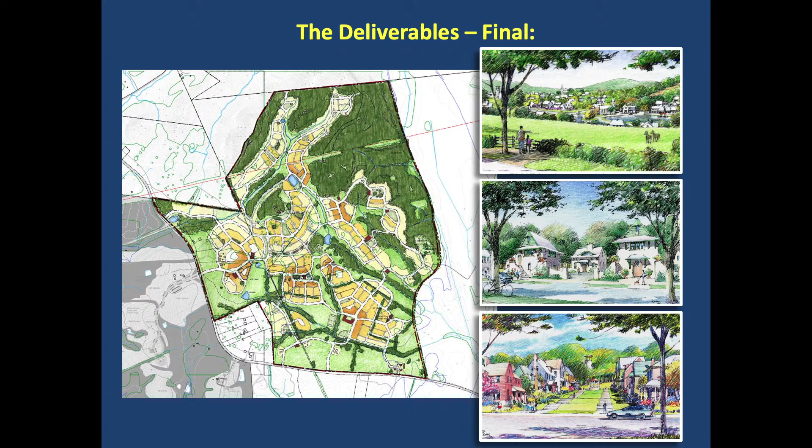The colors are much more legible on the plan we're doing tonight, so hopefully that issue will no longer be a problem. Compatibility with the 2007 comprehensive plan from a policy point of view, this idea that a neighborhood has a general format of a neighborhood center, neighborhood general, and neighborhood edge condition.

Again, the color is awful there, but the neighborhood center is, as the name suggests, typically located in the physical center of the neighborhood, and it's the most compact, where the smallest lot residents typically reside, but it's also closest to neighborhood amenities and services.

The general is both the largest area, but also has the broadest and most diverse range of house types. And then the edge, typically, particularly in a context like this, is usually where we always put the largest lot, single-family detached houses.

And of course, this photograph is from right down the street. And when we say largest lots, you have to qualify that, because the average size of the lots over here in Forestdale is about one-third of an acre.

I just realized, maybe it is in here. I think I've got it. There was some discussion about sustainability. We talked about the Carolina Coastal Conservancy.

They did a very detailed study analyzing the different water impacts of natural conditions, sprawl conditions, and town conditions. And a lot of that is based not only on the reduction of the developable area compared to conventional suburban development, but also on best practices in stormwater management for water quality.

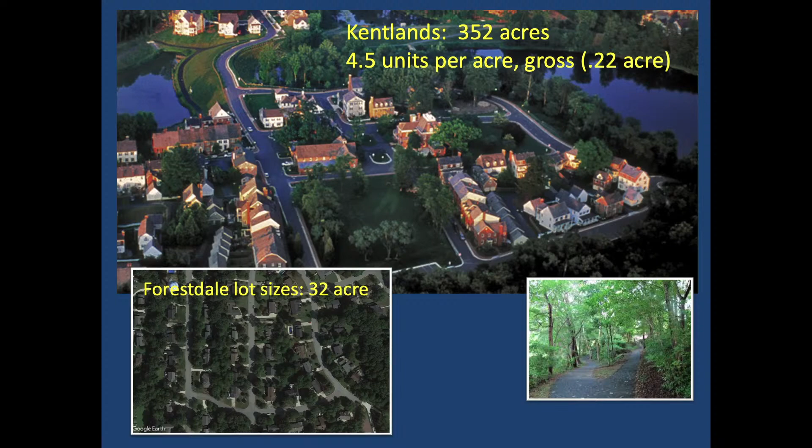We compared that to Forestdale right down the street. The average lot sizes, which we measured on Google Earth, were 0.32 acres apiece. So the net and the gross, comparing Kentlands to Forestdale as a neighborhood, were actually relatively close. That means there are probably a lot of lots within Kentlands very similar to Forestdale. We used that as our baseline in designing this community, so that this property would be sure to have a significant number of lots that meet that standard.

That gave us the beauty of this, and one of the reasons why we take this approach — it gives us the ability to talk to both plans and analyze each one relative to how closely it met the community's expectations, how well it responded to the underlying principles we discussed. We got a lot of very useful feedback from both of these. But the most important thing is that they were both well liked by the respondents, and they were evenly split in terms of preference.

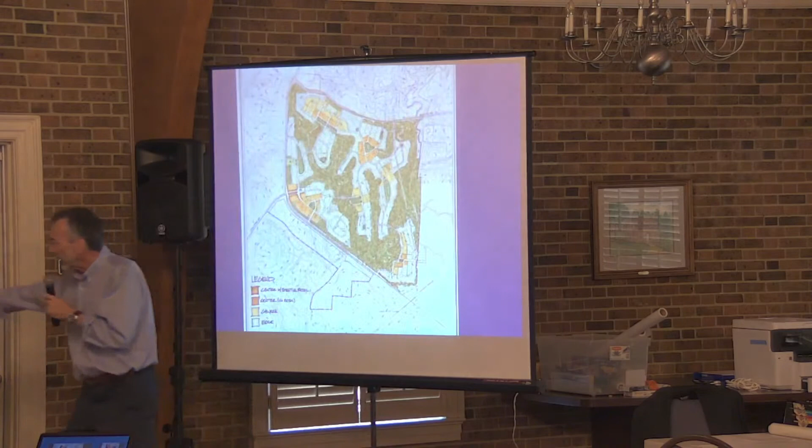The designers will try different ways of reconciling some of these things. You see right here, for instance, this green and this green, you're still seeing a lot of the same ideas, but in a slightly different configuration, both in terms of trying to merge the two plans and resolve them more closely with the topography.

I'll show over here that park right in the middle of this neighborhood, as well as this park right here — they're there because there was a large stand of trees in this area, and this was a high point on the site. So when we see something like that, we want to capture it and make it an amenity, both because of those unique characteristics and because by putting a square there, we're able to save as many of those trees as possible, keeping them as a shared amenity for the neighborhood and community, and because of that high point.

That was still there, but then when we looked more closely at the topo in that area, we realized there was a significant draw that came up and actually touched on that. So we let that come all the way up to that green so that now you have what we called, within the team, a peekaboo — an opening where all of a sudden the neighborhood opened up to the adjoining natural habitat. We really liked that idea because that was basically the site talking to us.

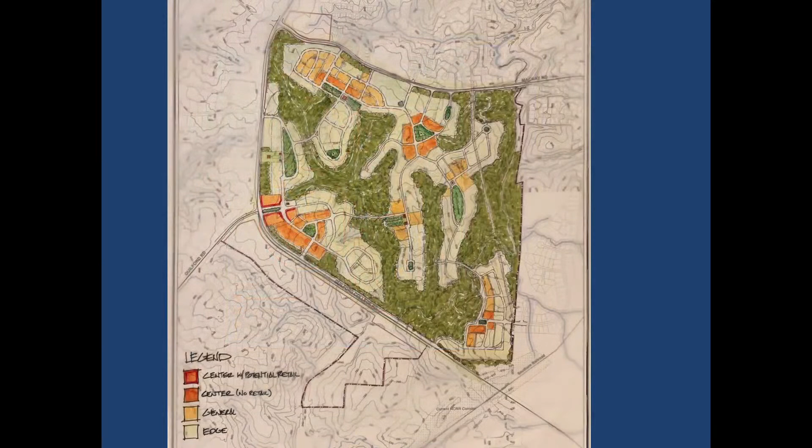So there's the neighborhood structure we talked about on opening night, the four neighborhoods, which have really become, I think, because this is mostly driven by the topography, the defining characteristic in all the plans.

Take a moment also to mention that we have not done — I think this is in the final plan — a specific proposal either for this part of the plan or that. We did look up there at the upper northwest corner, but the topography was challenging, the access was challenging, so we decided to keep our focus on the main property, and those are, to a certain extent, really incidental to our primary focus anyway.

However, I will say that all the things we've discussed for the primary parcel could influence and be applicable to those as well.

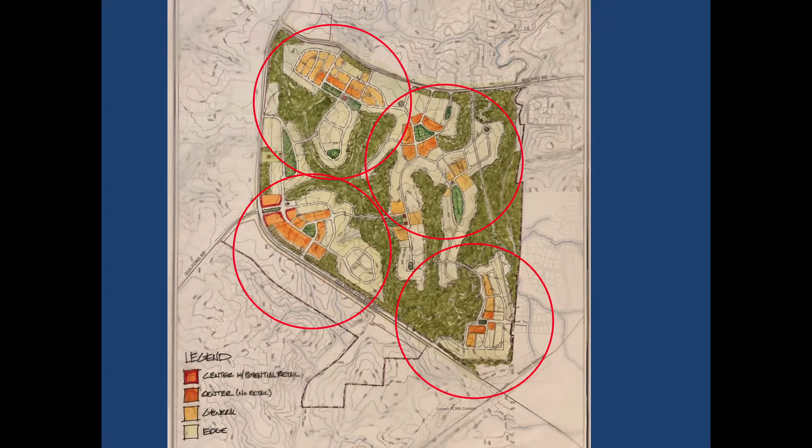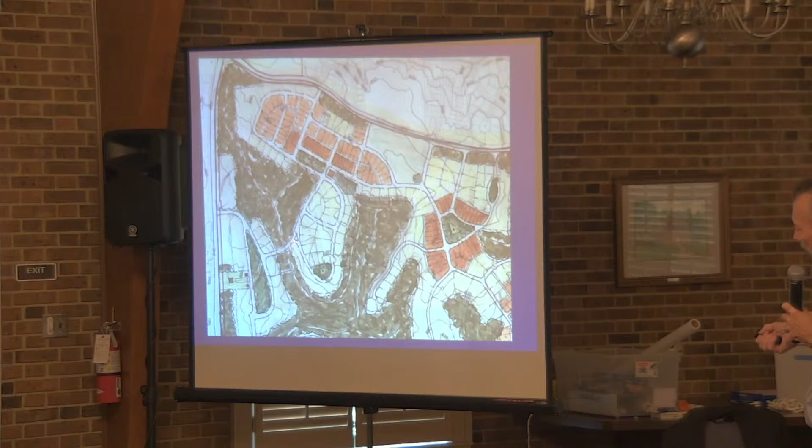Okay, so at that time, and I believe this was the Thursday night pinup, we did an illustrative platting on a detailed plan just to help talk again about this idea of a retail center, a neighborhood center — neighborhood general condition, which is this slightly lighter shade, and then neighborhood edge. You can see the lot sizes change within all of those areas.

We also talked a little bit about the idea of incorporating the existing tree line into the plan and preserving that edge.

There was a large depression here, which unfortunately the color doesn't show, but we decided that it would have been very problematic to build on without a lot of grading. So we decided to both make it a feature of the site and also a gift to the adjoining neighborhood as open space.

So this is kind of an interesting juxtaposition. This is a peekaboo from the neighborhood out to a forested, vegetated nature area, and this is a peekaboo into the neighborhood, in what is essentially a meadow. That's the kind of give and take that a thoughtfully and sensitively designed plan can give you.

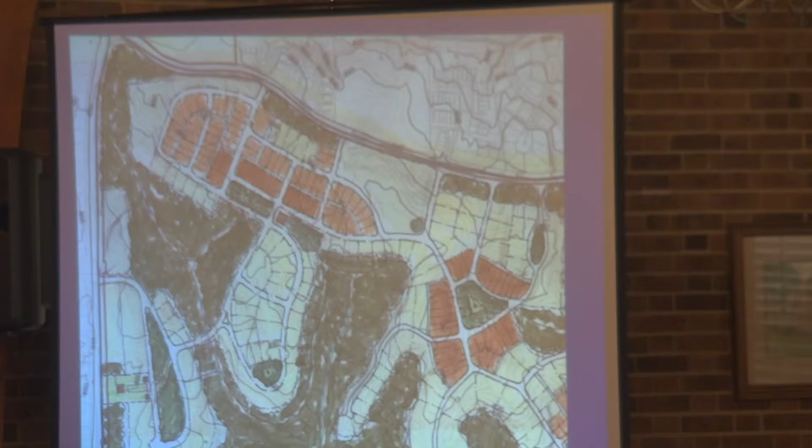At this time there was still a lot of confusion about neighborhood edge, neighborhood general, and neighborhood center, and we were having a lot of trouble with the colors on the plan. So this is the neighborhood edge, showing where that would be. Anywhere you see this color, that would be that condition.

That would be large lot, single family detached, typically backing to nature — that's the neighborhood edge. Neighborhood general would have smaller houses on smaller lots, very walkable, with sidewalks, et cetera.

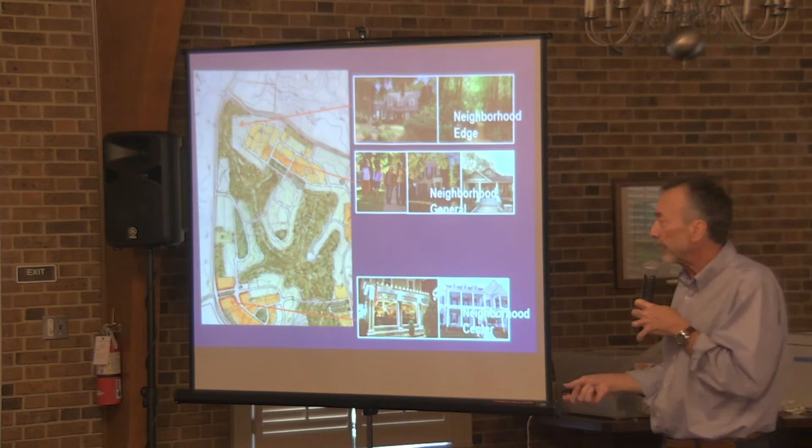By the way, depending on where it's located within the community, the neighborhood general typically has curb and gutter and sidewalks, but on the neighborhood edge you may have no curb and gutter and no sidewalks. But again, that's a detail issue that could continue to be discussed, meaning it was more context sensitive.

And then, of course, the neighborhood center here — just in this one location, we talked about the option of allowing a limited amount of retail only in that neighborhood center.

All of this can be coded specifically in the development agreement or the master plan, so that even though the neighborhood center is a neighborhood structure, you could designate where the retail might be located, in what neighborhood and what location. So this is, again, something the community can decide. And that right there, I think, is going to come up with a sketch, so this is a detail of that.

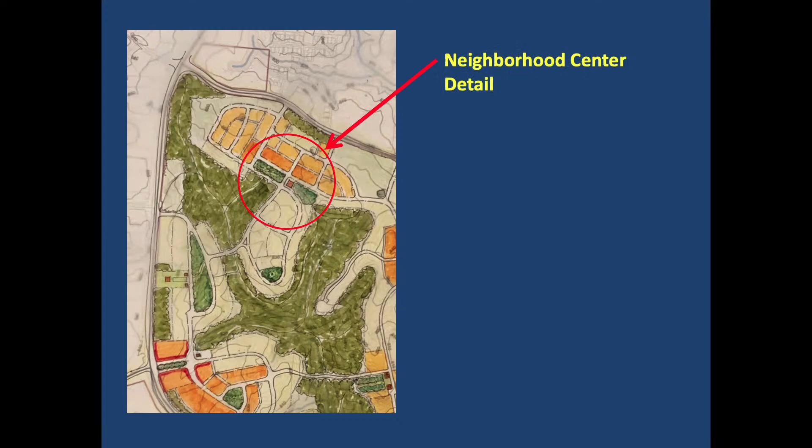Sorry, it was a little overly dramatic. But this was actually sketched, I think, Tuesday night, when that plan was a rough sketch.

And then this went to our remote renderer, Peter Roper, and I got that back, I think, right after — I believe I got it back on Friday, so it wasn't in time for the Thursday night pinup.

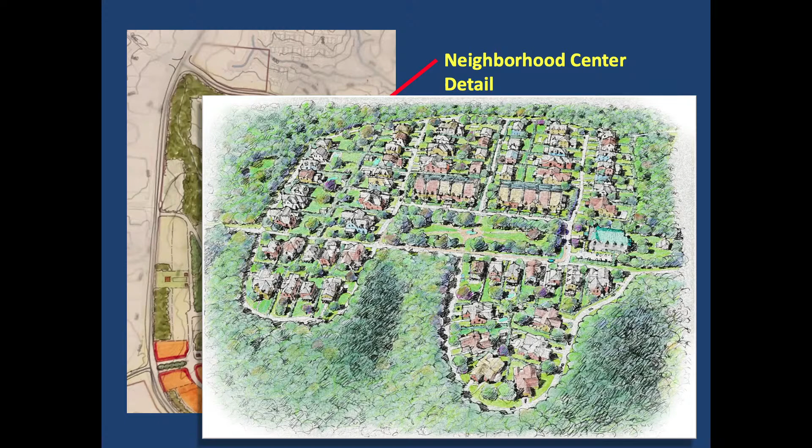But again, it talks about this idea that we overlay the neighborhood structure on the topography. In this case, this is that internal neighborhood connector road that traverses through the center of the neighborhood. That's the green that you saw in the plan.

And then this was the peekaboo feature that we captured. So if you lived in this neighborhood, or were passing through on your way from one neighborhood to another, you would not only have this nice neighborhood green, but as you're passing through, you would get access to walking trails in that view.

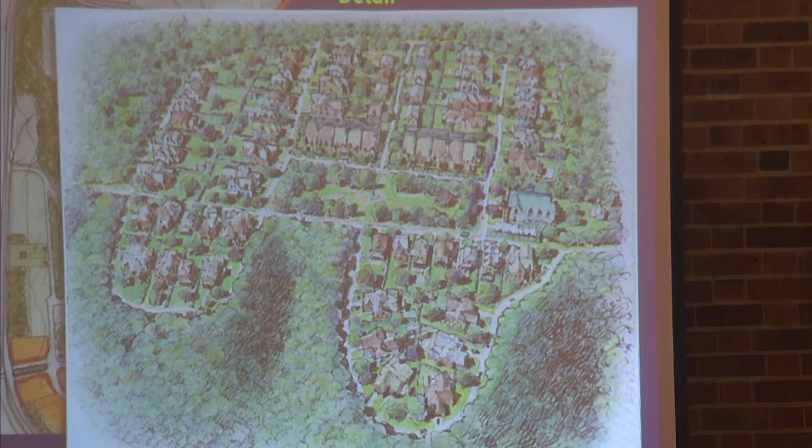And of course, these would be the larger lots on the periphery of the neighborhood, so it's a little easier to see and understand in that context, obviously.

Because up until this point, we were just talking about these principles in general terms, and now we're getting feedback based on the specific plan concepts that were developed and presented.

But you can see how the plan over here is already starting to refine. Even though this was a good representation of those 2 plans combined, we knew, even as we were drawing it, there were opportunities to make additional refinements, to fit the plan even more tightly to the site, recognizing that the better we fit the plan to the site while still meeting all the goals, objectives and principles, the more open space saved, less grading, and more of both the original habitat and the character of the land retained.

So every time we redraw the plan, we go back and revisit all of those things, and we try to make it as good as possible. So you're already starting to see the next generation at work, and we pieced them all together to create another composite plan. It's a little hard to see it in those color ranges, but we then copied it onto black and white and drew it into the final plan, which is what you're looking at right there.

So the plan that you saw a second ago became this plan, and now it's finally drawn in a way that allows you to see it in its entirety. We also colored this digitally, so this is the first plan that we've colored digitally, which gave us much greater control over the color palette.

So here you can see this idea of the center, general, and edge condition is much more clearly articulated and much easier to see. You can also see it in relationship to the site itself. I'll just walk you through very, very quickly. This was neighborhood 1, 2, 3, or 4, whatever, the 4 neighborhoods, the same as what we had before.

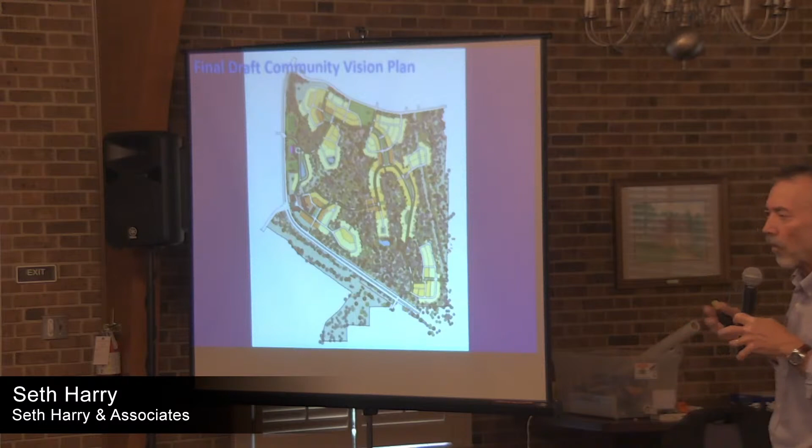So what we've done is we've identified a site that a school could use, and by the way, a lot of the communities that we work in, we specifically challenge some of the site size criteria for public schools, and some communities have been successful in getting them down to a more realistic and manageable size, so you never know.

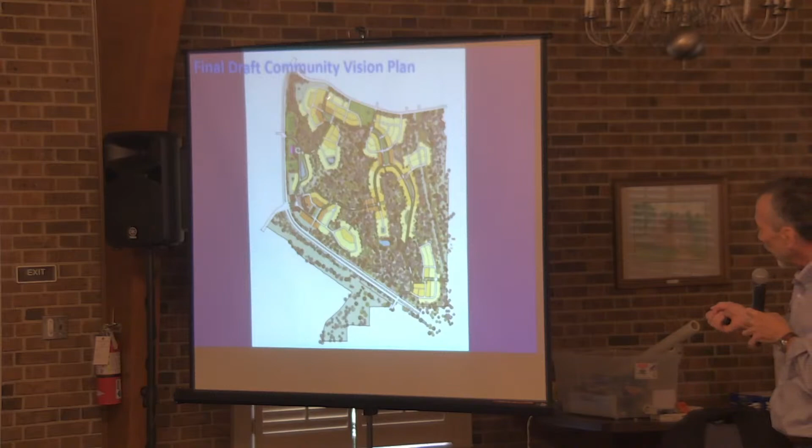But it's in the plan now, and it is the best location for that kind of shared community amenity and asset, because it's shared by both this property as well as the larger Jamestown community. Talking about neighborhood center, neighborhood general, neighborhood edge, et cetera, there's a lot of very specific detail features here that are now starting to really come into focus.

There's the meadow properly colored so you can actually see it. We're connecting these neighborhoods with this long linear park or green feature, another one here, and this is really responding very much to the topography. When we have a ridge big enough to support one block or double-loaded street but not enough for two, one way to respond is to take advantage of the additional space and put it into a shared amenity like that green.

This is the gas line right-of-way coming through the site down here. Some of the things we talked about throughout the week are now becoming more self-evident: the vegetated buffer here along Guilford College, which is retained in place, and the very small neighborhood-serving commercial center here at the intersection of Guilford and Guilford College Road.

We're also now showing the stormwater management facilities, much smaller based on the assumption that we'll have the ability to put in things like bioswales, bioretention ponds, and so forth within these greens. We're actually showing one there, so we're capturing the rainwater where it falls and getting it infiltrated into the ground. All of these things are more ecologically sound, but they also maximize the developable area of the site and preserve as much of the natural habitat and surface hydrology as possible of the existing property.

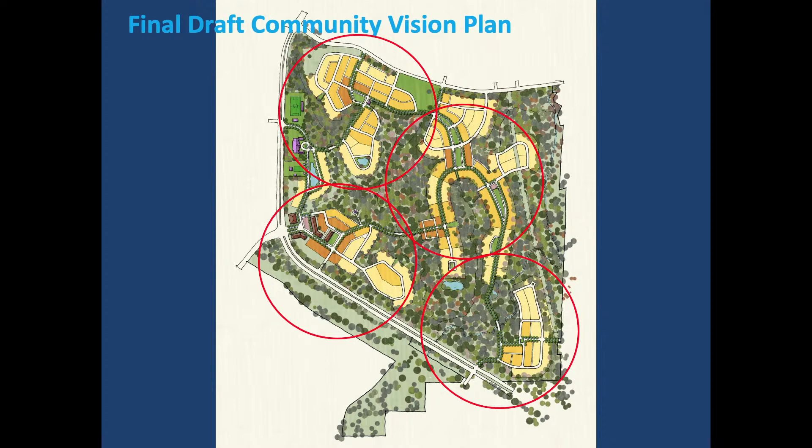I'm going to go through each of these neighborhoods in a little more detail, using my cheat sheet here. So we're going to do the northwest neighborhood first, at this blown up scale. I knew this was going to happen if I didn't put the top back on.

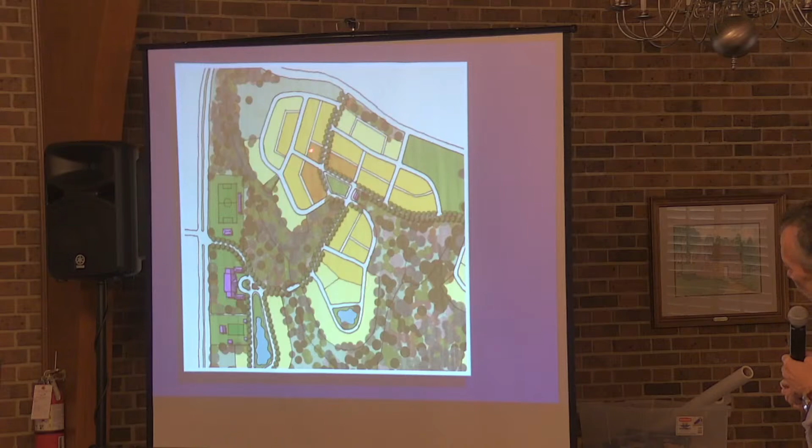Okay, we talked a little bit about the soccer fields. The entrances here to the neighborhood correspond with the existing street network off-site. This is the small neighborhood green, and typically what we do with neighborhood plans like this is you see the green, that's where the neighborhood center is. These might be where the townhouses are located, and then we also have a neighborhood amenity, whether that's a pool or a smaller community center specific to that neighborhood, typically located in the center and closest to and most convenient to the most number of people.

There's a blow up of the soccer field. That's the existing farmhouse right there, which has been turned into a formal garden, a restored formal garden. This whole piece here collectively becomes a tremendous community asset for both Jamestown as a whole and this community, and because now we have the plan, you can see it much more clearly.

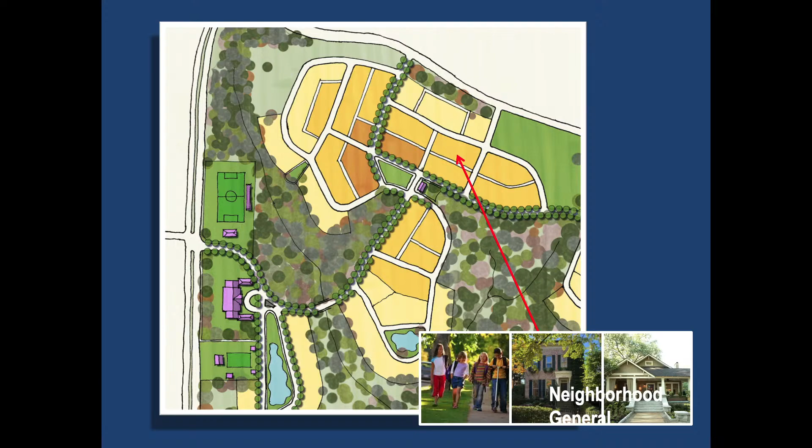This colored area represents the idea of the neighborhood general condition, which we've been talking about since Monday night. There's a lot of other things we're talking about here too, which you're starting to see. These connections follow the original connections that the owner's engineer had indicated would be the least impactful on the community, on the existing site.

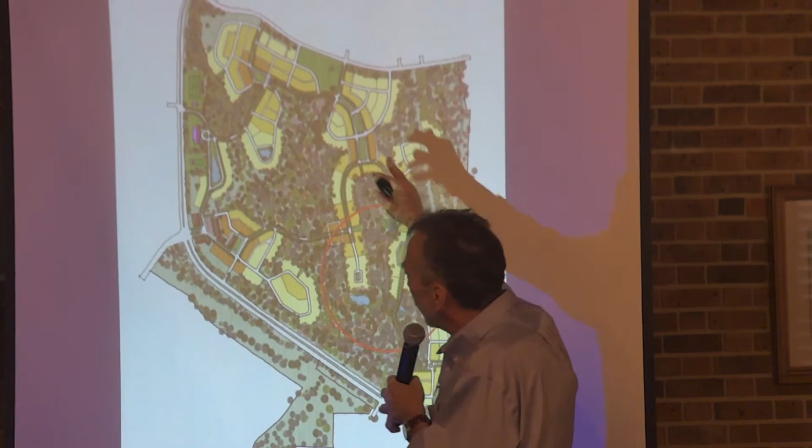But we also looked very carefully at another potential connection here, which we do think is feasible. Once we have all of those pieces in place, you can see you have a much better connected community as a whole, and all of those connections go directly from neighborhood center to neighborhood center to neighborhood center. So you can visit all of your friends and neighbors within the community without having to go out onto any of the adjoining surface road networks.

The other thing you'll see shortly is we have diagrams showing an integrated trail system here, and when we get to the diagrams you'll also see how the street and road network lays out on the site very clearly. We'll talk about that in a second.

I think this is the glitches. I think I was going to change that to represent another location. Oh no, this is it. But we talked about this already, this was just kind of highlighting.

I don't know if you want to talk about this at all, Scott, or if there's anything I'm leaving out, feel free. Scott did a lot of the design work on it. If there's anything I'm leaving out that I failed to mention, feel free to jump in.

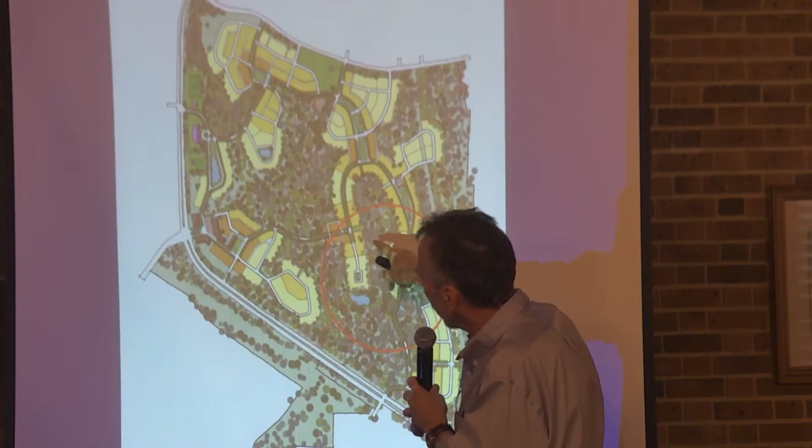But this is kind of interesting. These connections were aligned specifically to limit the length of the dead-end road, so we've dramatically reduced those from the early diagrams to better facilitate connections between all the neighborhood centers. When you're in the neighborhood center here, instead of having to walk all the way around, these will connect directly to the trail system, so if you live here and have a friend there, you don't have to go all the way around to visit them.

You'll see that more closely when we get into the diagrams. This idea, just to blow up here, this was essentially a dead-end road in the earlier version of this plan. So we both shortened the distance to a connection, but now we figured out how to bring the road through and down and connect it to this neighborhood here, which was something we studied very carefully. So you're really transitioning from a neighborhood center to a neighborhood edge, right out into nature.

Or here, as the case may be, like out here at Forest Hill, out your back door into nature. So you'll have access both from private lots and from the neighborhood as a whole. Many, many ways to access those trails and navigate around the community on foot, bicycle, or car.

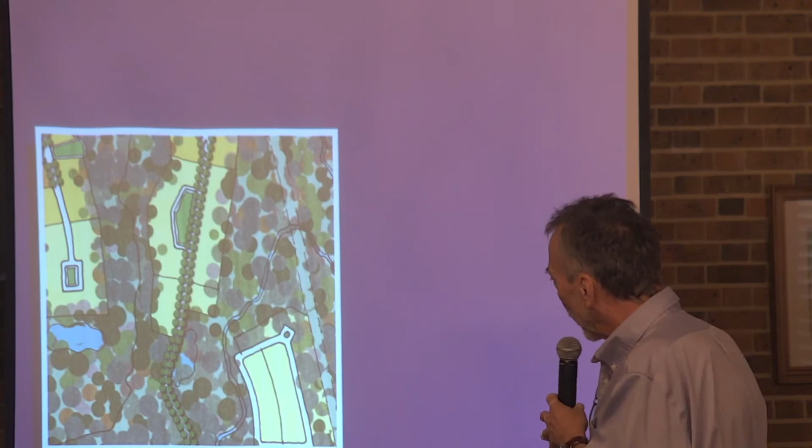So this was a sketch of that area I just showed you, as you're coming off of that ridge and then down the hill into the adjoining neighborhood. This was the only drawing I had. I did a quick sketch of this last night, refined it this morning, and sent it to Peter. Peter was working on another sketch as well. I got this black and white line drawing about 2 hours ago, and about 2 minutes before 3, I got the color version, which you'll see in a second. But it helps you see a little about the process, how we work, and how we go from the plan to the specific to the three-dimensional.

And this idea of showing, again, these are the neighborhood edge conditions transitioning to nature. And there's the color version.

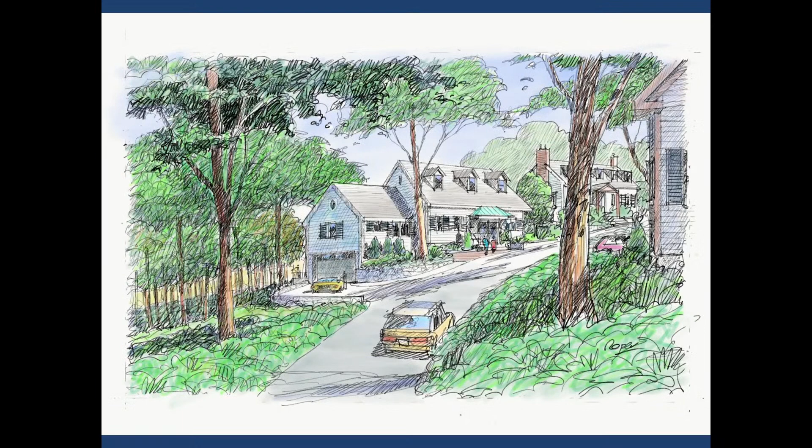These are all neighborhoods, so they have all the same principal characteristics of center and edge condition, but one of these neighborhoods connects to an intersection that connects to the larger community, and it would also be one of the main entrance points into and out of the community.

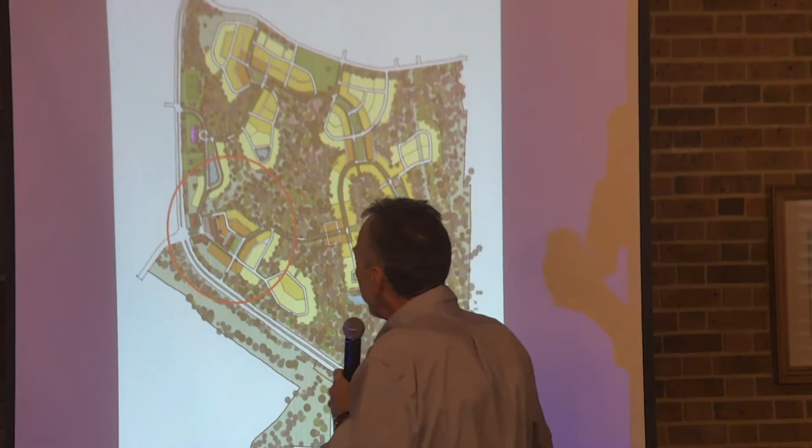So if you were going to do neighborhood retail, you had two options. One is to put it entirely internal to the project, as you see here. The other is to bring it out to the edge. Our experience - we've been doing retail in our community design projects for 30 years - gives us a lot of experience with both of those scenarios.

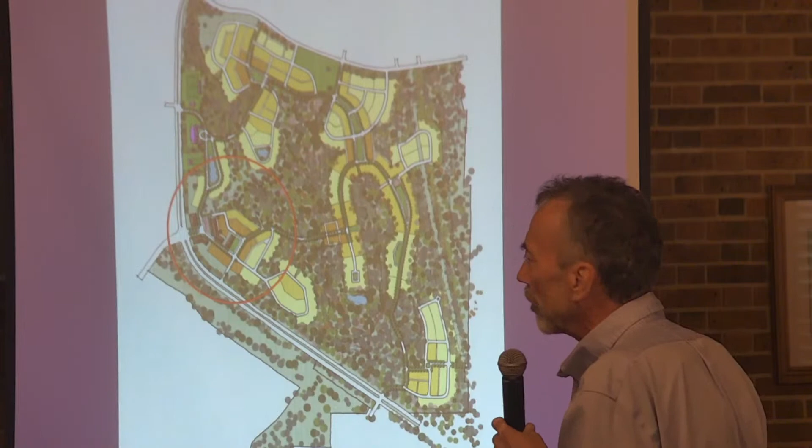Generally speaking, the retail survives and prospers much better if it has access to a larger consumer market. So we typically recommend that we place it, particularly where you have a signalized intersection like we have here, in an area that would benefit from that additional foot traffic or consumer traffic.

And that allows you to provide for a better quality of retail goods and services for all of the residents here, who would be the primary consumers to take advantage of that.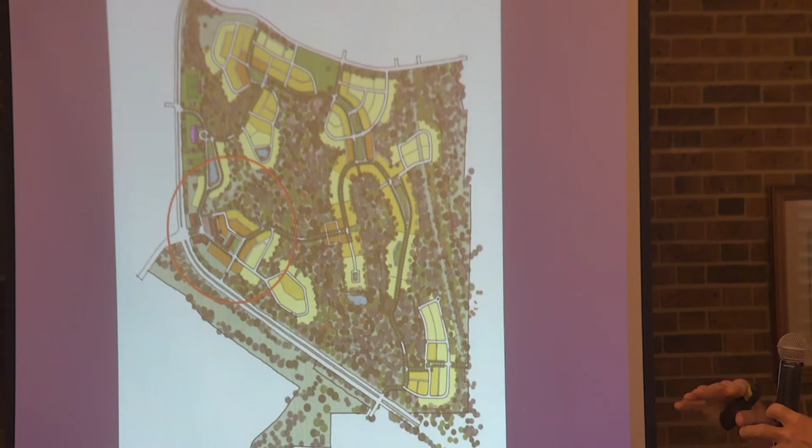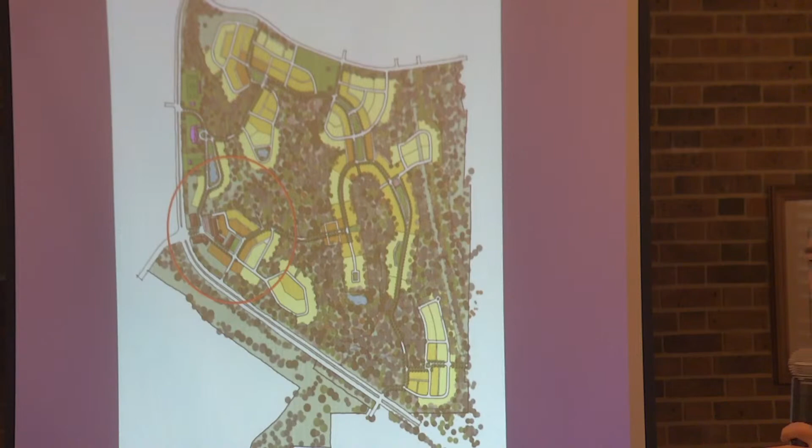Now, I've worked on projects where they had retail in a community like this, where the community was somewhat remote from the existing consumer market, and then the retail was brought into the neighborhood, but it made sense because there really was no local consumer market to take advantage of. Habersham in Beaufort, the project has been almost internally a community amenity, but typically most of the shops were actually run by residents who lived in the community. So it is possible to do that, but our experience is it's better to take advantage of that if you have it, both for the benefit of the merchants and also for the community as a whole.

So it's important to remember that even though where the buildings are located is the general area where the retail would be located, it's again still small and community-serving, but it's still within a neighborhood. So we have a neighborhood green here. This would be more the commercial plaza where you could have outdoor dining and so forth. And then the neighborhood center here again is residential. So most of this neighborhood is still primarily residential with all of the characteristics of the other neighborhoods, just in a slightly more convenient location in terms of access.

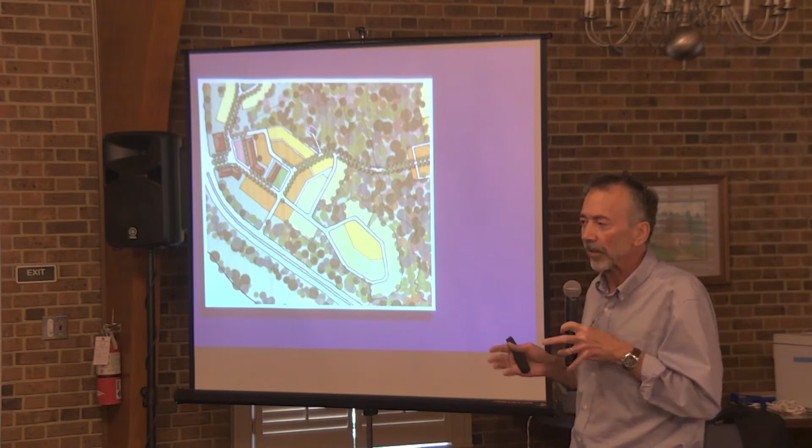This is the neighborhood center, but this is the only neighborhood center where we have indicated that retail would be allowed - they would not be elsewhere. And again, we could code for that, but what we heard was small, and if you're going to only have a small amount, we would recommend that be done only in one of the neighborhood centers. Because of the design of the community, where you're able to access that center from every single neighborhood within the community, we think this is a reasonable location for all the retail in the community. So it's a little bit of a balance between some of the different comments we heard.

So again, getting back to our original illustrations of what a neighborhood center might look like: small scale, neighborhood serving retail, and probably a little bit higher percentage of townhouses and things like that, so that the people who want convenient access to those goods and services have the option of securing it.

And then this was - let's see if it'll load - this was the rendering of it, and I got a little bit out of sequence here with the slide. So this circle right there represents the minimum area of this neighborhood, which is still primarily residential, in which the retail would be located.

So the idea here is that this would be the smallest retail node, if you will, with some shops around here. This is an outdoor plaza. Unfortunately, this is what happens when you're going fast and your renderer lives in another country - he's actually in Montreal, and I'm sending things back and forth to him. This was supposed to be what we call an attached green, so it came all the way out here, and he put a road in here which isn't actually there. But this is essentially a large community plaza where you can have community events and so on.

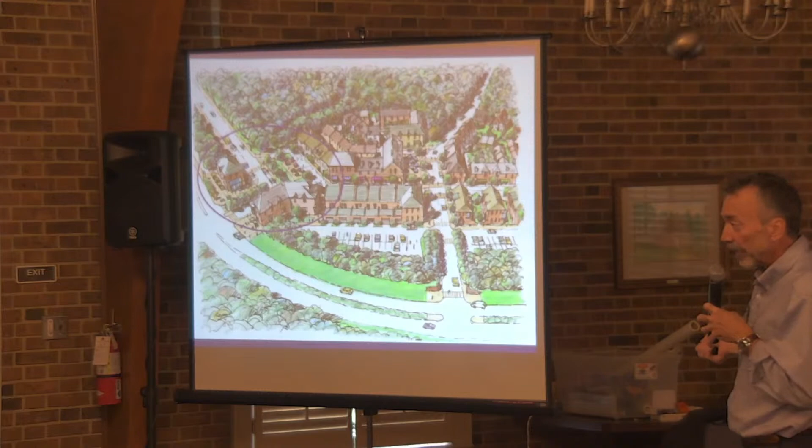Townhouses. So this is very much like the diagram that you saw previously. And then as you can see here, again this is an illustration, but you can see they start to transition to single-family detached here on the periphery. And these actually back right to nature.

So if we go back, I'm going to go back here one slide to the plan. So what you're looking at is this image across here, so that's that little retail node, and this is that internal green. So this is, if you're a resident in here and you don't want to come up here and go through this small commercial area, you can just do a right in here and bypass the whole thing.

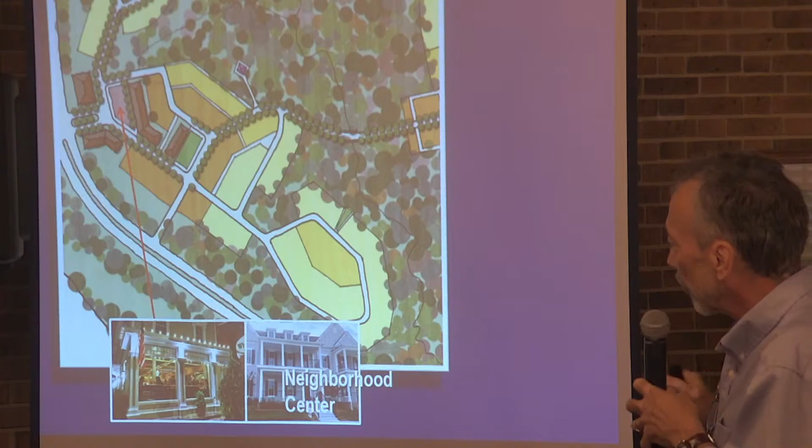But this is also a potential place where you could get some other retail functions and/or community functions to take advantage of that green. So this is an internal green. These are the townhouses that you see in the image, and then they transition to single-family detached out here, just like in all of the other neighborhoods. So this neighborhood, even though it has a small amount of retail, is about 90% residential.

So this is that internal square right there. And by the way, this is another thing we talked about early on: these small mansion flat townhouses. This would be a great location for them because these are people who like the convenience of living in a maintenance-free house, but also within walking distance of daily needs and daily goods.

By the way, these are based on a type in another project that I worked on. I don't remember what they sold for originally, but I checked on Zillow, and I think they were about $700,000 three years ago, and I think they're over $1 million now. Now, I forgot to mention that they're across the street from the Gulf of Mexico, so that certainly influenced the price a little bit. But the point is they're not slumming it over there—they're perfectly nice apartments, condos, I should say.

But the bulk of the value, as with everything else, is in—that's Rosemary Beach, by the way, if you're familiar with it. So they've continued to escalate in value very nicely since they were originally built.

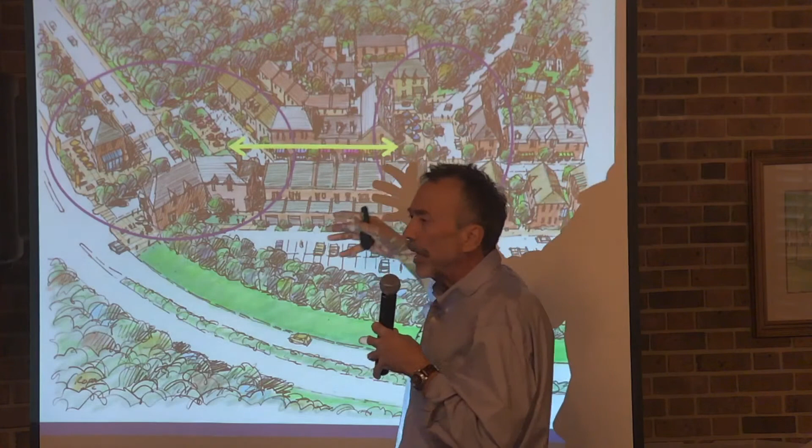And then once you have these two sort of anchors, if you will, within your neighborhood center, there would be some justification for adding additional retail to connect those. But that's completely up to you. I'm just saying the nice thing is that if you decide the retail isn't as bad as you thought it was going to be, you could certainly add more. Or if you want to just keep it very small and intimate, you have that option as well. That's up to you.

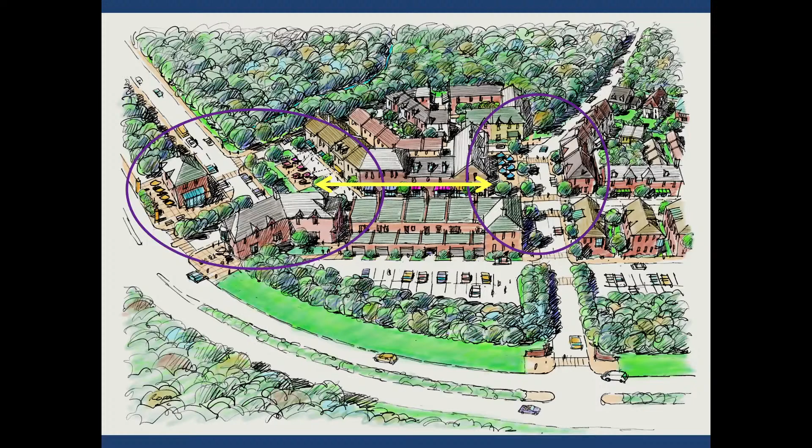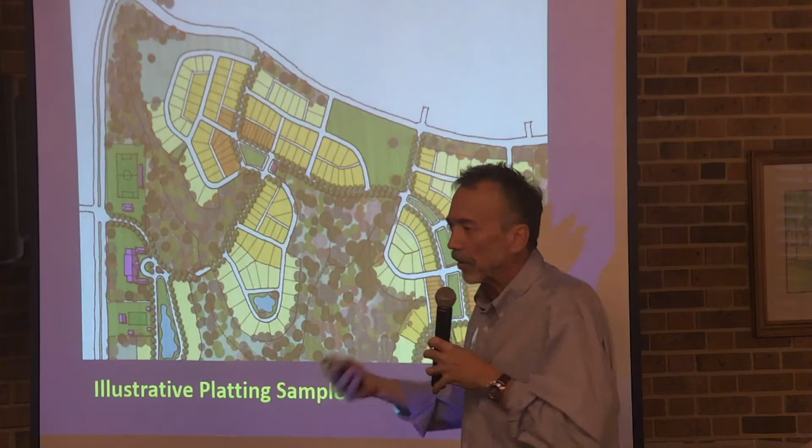We got a lot of questions about yield or density, so we wanted to do an illustrative platting sample in one of the neighborhoods, just to begin to get a sense of where we think we might end up with this. Think of it like you're painting with these colors, but those colors represent different building types and different unit mixes—it gives you a sense of the flexibility of the plan. We haven't yet done a comprehensive unit count for the project as a whole, but we've done an initial analysis of the amount of developed land this plan represents relative to the existing undisturbed site, which we'll get into in a minute.

But this is a good illustration of the smaller lots—these are narrow, single-family narrow lots, and/or potentially townhouses. Then this is neighborhood general, which is a little bit larger, probably exclusively detached in this market, and of course the larger lot, single-family detached. And this, again, is Mackey Road up here, just for reference.

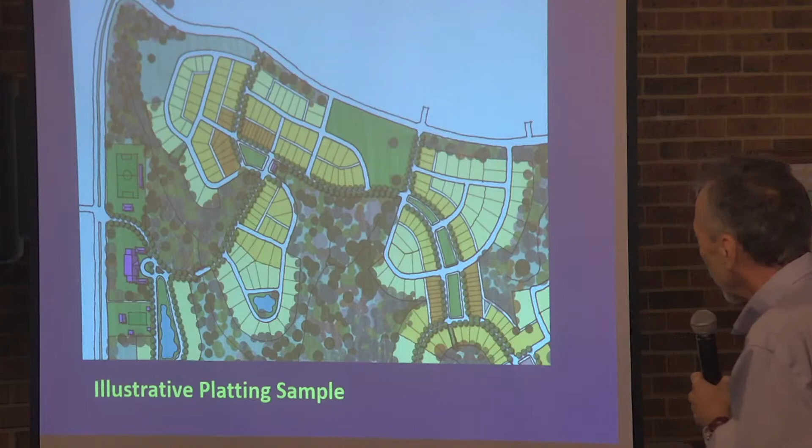So we've provided a very appropriate frontage, both with the existing tree lines but also houses, like-to-like, which we typically like to do. So we're creating a very inviting frontage to the residents and neighbors across the street.

Okay, plan diagrams. So these we usually do once we have a plan, a final plan or a final draft plan, as the case may be. We do a series of plan diagrams just to make it a little easier to see the component pieces that informed our process and how they relate to the street.

This is a little bit misleading because this is based on the right-of-ways—the actual street widths are quite a bit narrower than that. But you can see from this street network that it meets the standard that the majority of participants in this week's events asked for: connectivity. I probably should have overlaid the neighborhoods on this, but I'll just draw them in for you here with the laser pointer.

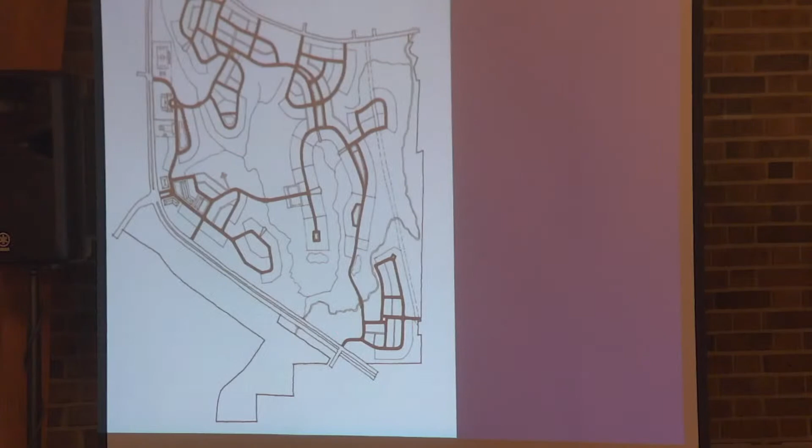So you can see very clearly the structure of the neighborhood centers and the interconnecting internal connector. The important thing is this internal connector goes from neighborhood to neighborhood. It's not dividing the neighborhoods, it's actually connecting and uniting them, which is a key feature.

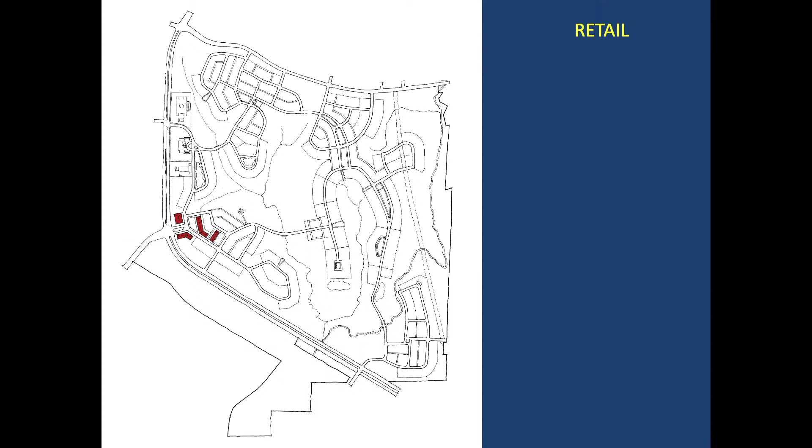Out of a total of 467 acres—and I need to clarify that does not include this large utility easement, and it did not assume any development on either of these two parcels at this particular time—we have 160 acres of developable land and roads in the remaining parcel. Which means that of the overall site, we're only using 34% as disturbed or developed area. Now, that's a pretty remarkable ratio, but in order to hit those yields and make this possible, you need those neighborhood centers and those higher density houses.

Yes ma'am, very quick. Well, they are now, yes. Yeah.

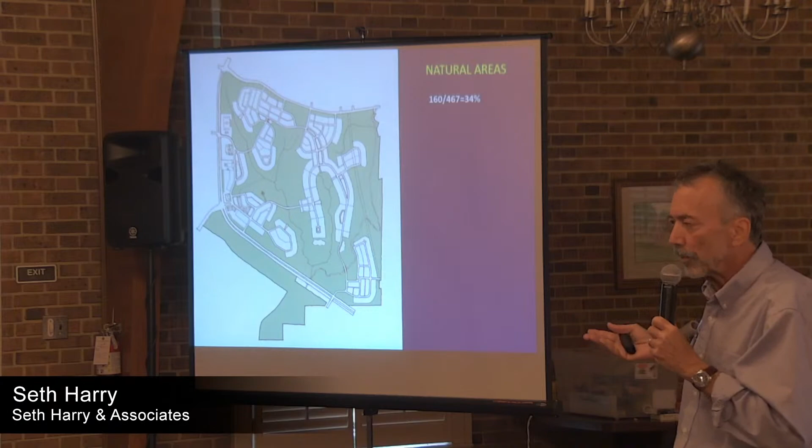And when Scott comes back, we'll ask him if you'd like, or you can ask him after the presentation. Scott, we just got a question regarding—I forgot, I need to repeat the question so you can hear it. The question was: does the green area, in theory, represent existing land and vegetation that could be retained in place, relatively intact, with the development of this property, based on these principles?

Hold on, come on up. Sorry, ladies and gentlemen, Scott White.

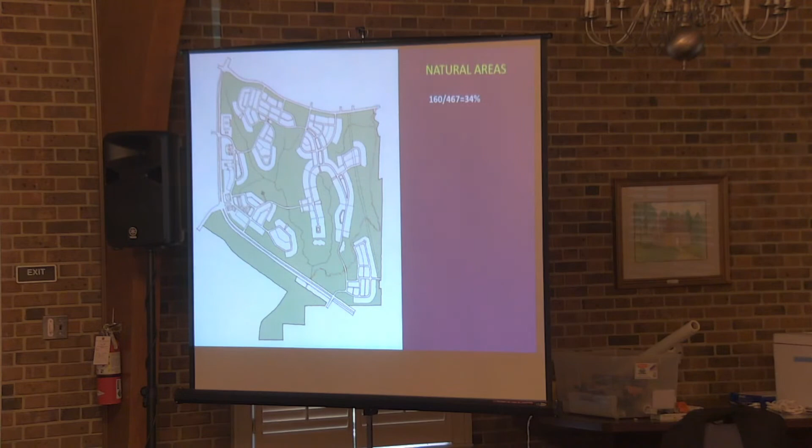To the extent we were able to walk the site and look at it, it's very healthy woodland, with a lot of regeneration underneath a pretty healthy canopy. Looks like maybe anywhere from 40 to 50 years old—I don't know when they stopped farming there. It's uneven, but I didn't see a lot of invasive exotics and things like that, so there's a lot of good regeneration going on. You'd be able to keep that and let that forest continue to grow and develop.

No, absolutely not. Thank you, Scott. I'm just looking—by the way, this was my cheat sheet, which is going to go up on the board along with the plan so you can see a lot of the features we've incorporated. One of the things on the cheat sheet, speaking to another aspect of what we'd be recommending, is this low area that we talked about preserving as open space.

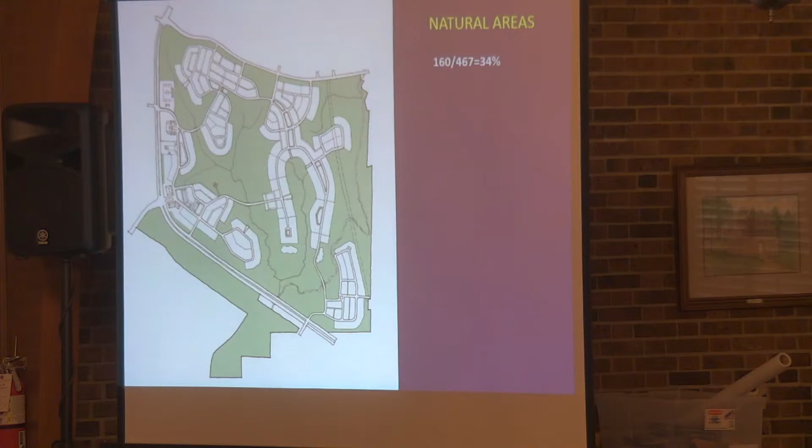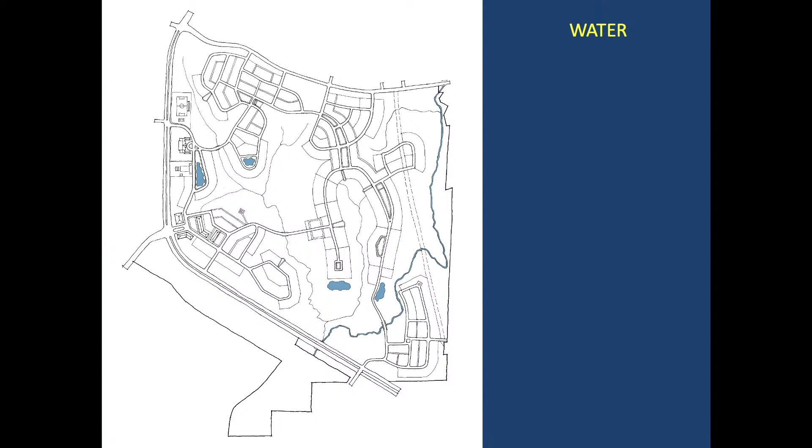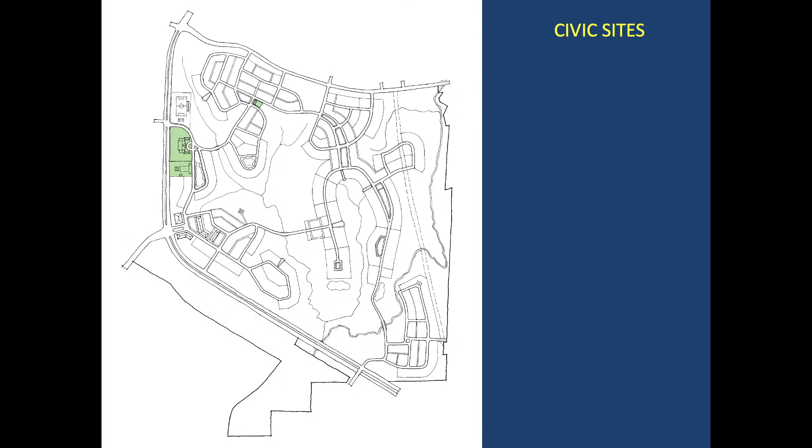These are the civic sites we talked about previously—the civic amenity, whatever that might be, whether it's a community center and/or potentially a charter school. And then that's the existing farmstead that would be preserved and rehabilitated in its historic state.

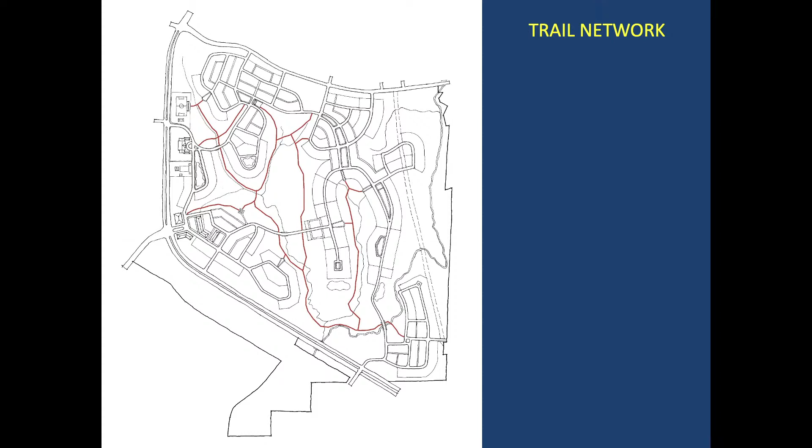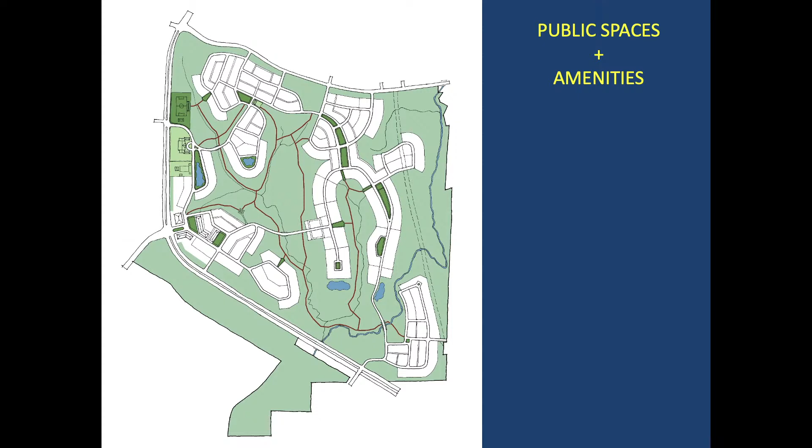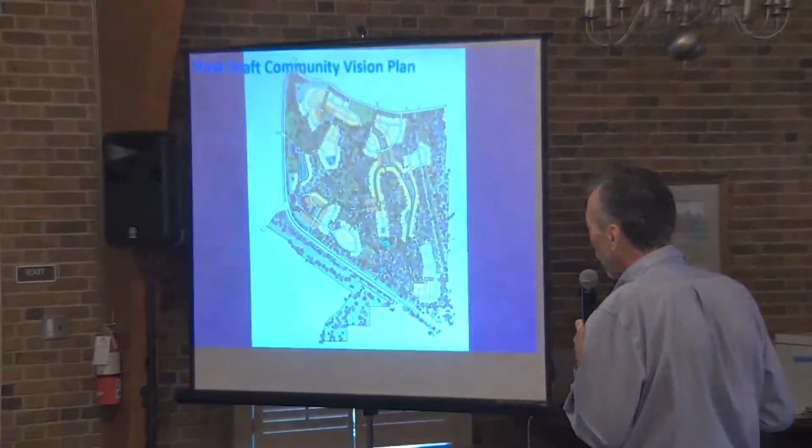I think this is both technically feasible and hopefully financially and market feasible, with the support and input of the community, which we very much appreciated from this week.

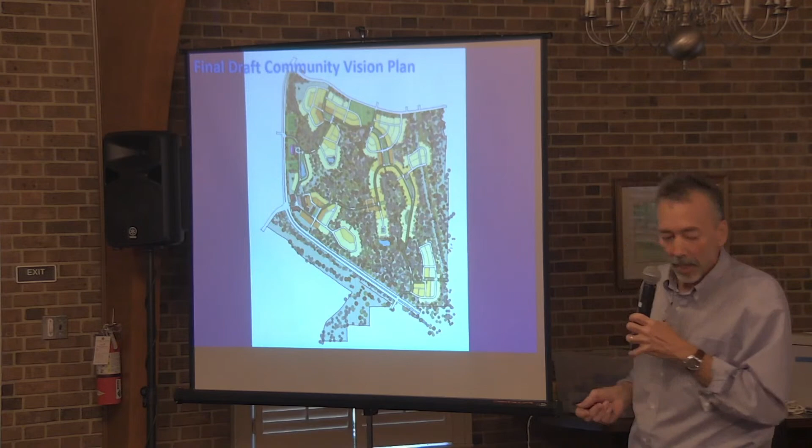We would welcome any additional comments, because this is not the final plan. We will take all of the work products we produced this week and put it together into a document, summarizing everything we heard, the things we responded to in generating this plan, and any additional refinements from the feedback we get today.

And then that will be the basis for informing the negotiations between the town, on behalf of the residents, and the property owners, in determining how best to develop this property, balancing out all of those considerations.

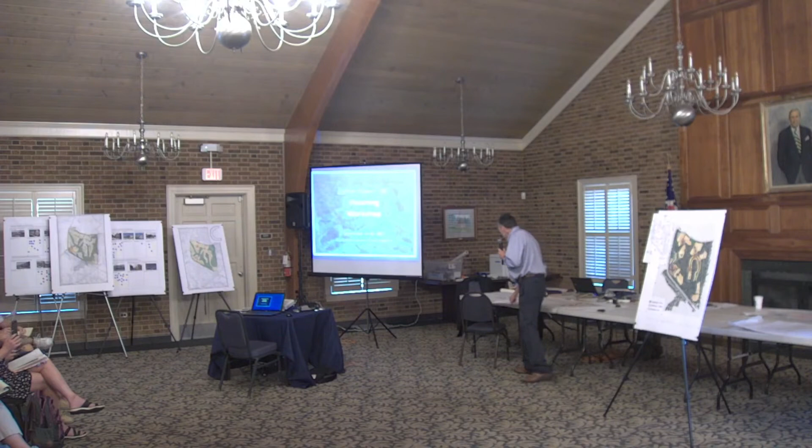The question is, is it within our purview to request green roofs? The answer is, if the community says they would like that to be in the code, we could certainly do that. I'll say this is by definition a very green community, and the application of green roofs is fairly specific—there's a couple of purposes to them.

Obviously you want to reduce the heat absorption on flat roofs. Current building codes—and I'm an architect as well, so we deal with this all the time—the energy codes now are way beyond what they were 20 or 30 years ago, far surpassing the best practices of only a generation ago in terms of insulation and roof colors.

Generally speaking, green roofs are mostly used on large commercial buildings with flat roofs because they have the most significant impact. The other reason green roofs are often used is you can use them almost like a water retention facility, to absorb the water and release it slowly, filtering it as you go.

This is kind of intrinsic to the plan already. We're also talking about incorporating bioswales and similar features, all of which essentially do the same thing—managing the water quantity, the rate of flow, and the water quality. These communities, as we showed with the Carolina Coastal Conservancy study, are already way ahead of conventional suburbia in that regard.

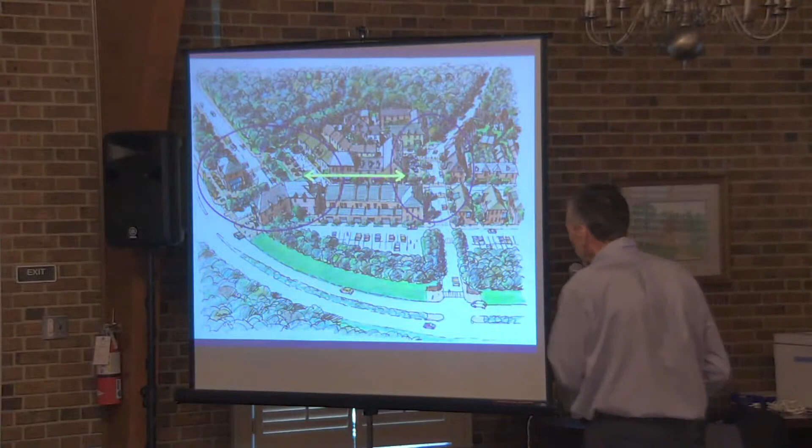But let me back up, because I want to show you the garages. We put them in there not because we thought these are the final garage doors, or because we're going to be breaking ground on those tomorrow, but because we recognize that even people who live in townhouses typically drive cars. So I'm very confident that this plan could be built out as represented in this illustration. Thank you. Yes, ma'am.

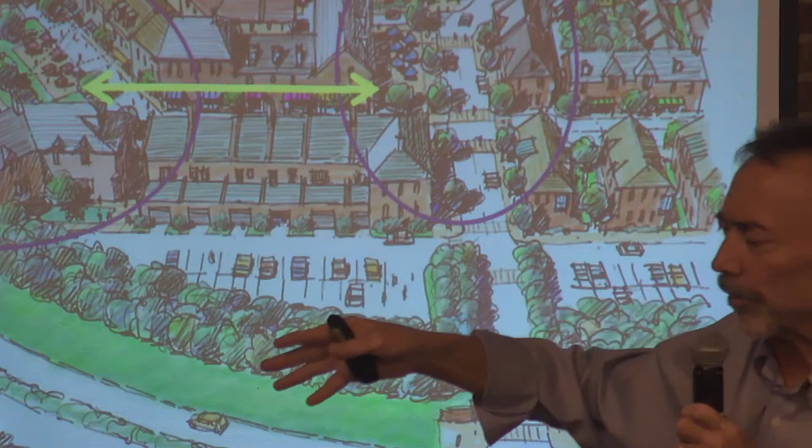These were the small mansion flats - and again, this could just as easily be a single-family house - but these had pretty broad support based on our surveys. All of these things are essentially an illustrative placeholder for things we heard from the community that there was support for. We think this would be a good location for that house type, for people who would like to live in a very maintenance-free house very close to neighborhood amenities.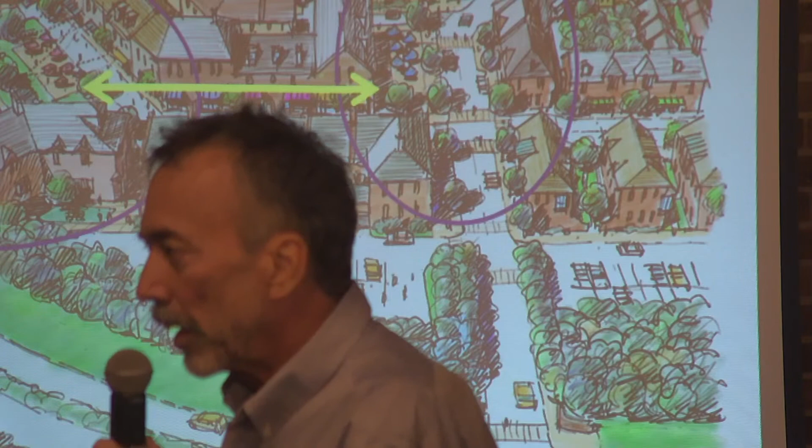Okay, I'm sorry, were you hearing any of the earlier part? Okay, sorry, I think there's a picture of one up here somewhere. It's right here, I'm sorry. The question was, what is a small mansion flat? A mansion flat is...

No, it's not just an apartment with a fancy word. It's a building type that resembles a large single-family detached house, but it's subdivided into condos for people. We're putting condos there. People live in a lot of different things - my mother lives in a condo, just so you know, and she's a pretty nice lady.

Okay, any other questions? The hand went up right back there. Yes, ma'am. Okay, the question is, the green parks appear to be a different color than the textured graphic.

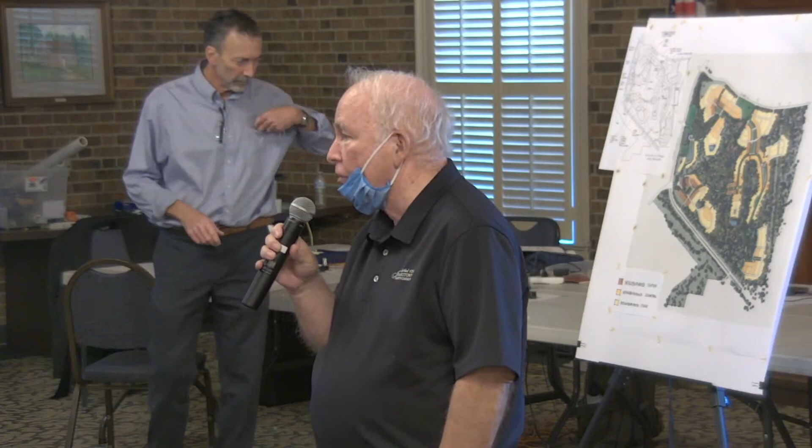Several months ago we had a strategic growth plan meeting, and we invited in the schools, the sheriff's office, the Pinecroft Sedgefield Fire Department, High Point, Greensboro, and the Partnership for Water and Wastewater. We're taking a look at sanitation pickup in terms of recycling and garbage. We're looking at the services, the income, and expenses just to make sure everything works. We're also participating with Pinecroft Sedgefield on a 50% basis to determine the site of a fire station for this area. With 40 years as a town manager, I've located many fire stations, and it's based on service - it's pretty precise where you would want to put them.

We are working to see where that would be to get the maximum coverage. We do enjoy a Class 2 fire rating, 1 being the best in the state, and that's quite remarkable for our town.

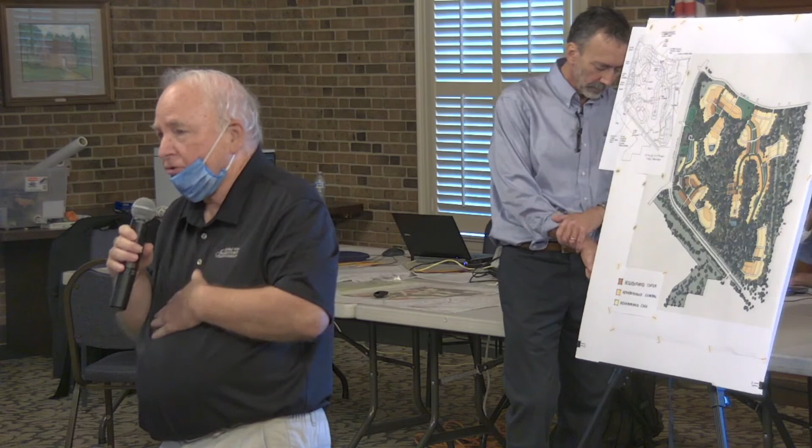In talking with the sheriff's office, they do have a district office here in town, but they're not located based off of areas. They serve a much larger area, probably 10, 12, 14,000 people, and they have district offices. So what we may be doing, rather than building another place, is adding additional officers that we would be paying for. We do have a contract with them, and right now I think we have 4.5 officers.

If we are adding additional officers to provide the same level of service, they're not particularly tied down to a location. Probably in October, or certainly early November, the results of the fire study will come in and we will know where they need to be.

Pinecroft Sedgefield serves not just the town of Jamestown, and as you know, they're located in our facility over here, but they're looking at where they need to be, not just with growth in this area, but within their total fire district area.

Anybody, maybe some new names, yes sir, new faces. I think this has been a really good process. I think it's really good that representatives of the board are here as well.

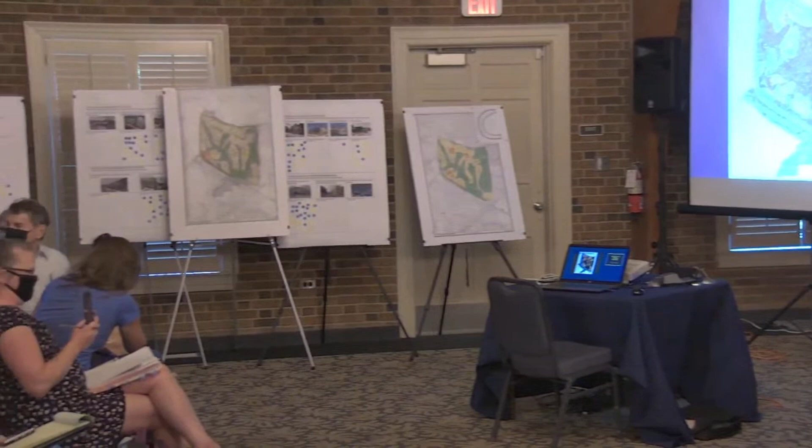But here's my question. With that in mind, that was presented kind of as a comparison standpoint from size, and I'm not trying to put anybody on the spot with this question, and I don't expect a precise answer. But matching up these visions with the realities of the ownership and the business of who owns this particular property in Jamestown, vastly different from the local developer that did that and went back to the bank, versus a national and very well-renowned, good home builder that's done things across the country. There's a real juxtaposition between the two, and I'm still struggling with how this meets that.

Well, it's a good question, thank you for that. The statement was a reference to Kentlands' early build-out in the early 1990s. The timing was not great - there was a recession just as Kentlands was coming out of the ground. These are very capital-intensive projects compared to conventional suburban developments, so there's a critical stage in the early build-out if you don't have deep pockets. At that time, that was a brand-new concept, and it was particularly vulnerable to that kind of downturn.

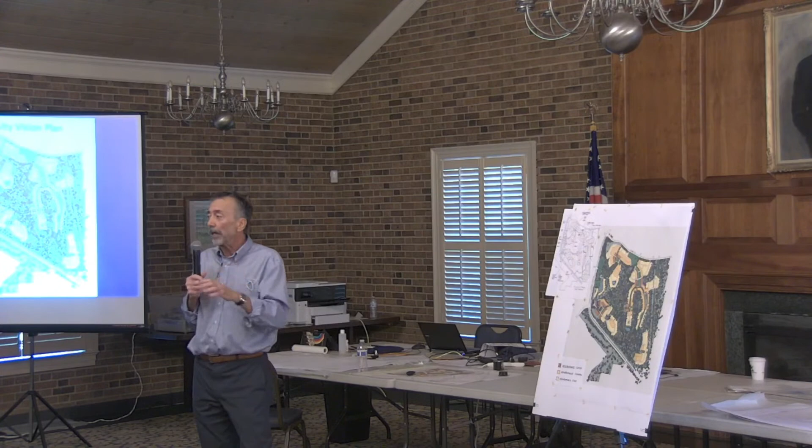Keith wanted to remind me one more time that this is an illustrative plan intended to facilitate a conversation. It represents everything we heard this week from the community, applied to this specific piece of ground, and based on and informed by our own experience with similar projects and the principles we typically design to. But first and foremost, it represents your input. It's mostly here so that we now have, as a community, a shared frame of reference to continue this conversation.

Suburbs of Gaithersburg, or suburbs of Nashville, or it sounds a bit like a suburb of Jamestown. I'm just wondering, do you have past experience with designing something this big for a community this small?

The short answer is yes. We've designed communities bigger than this for communities smaller than this, and we've designed communities smaller than this for communities much bigger than this. I think Dave misspoke when he said I've been doing this for 30 years — he's given me a little bit too much credit.

Some of them, absolutely, some of them were. We've applied these principles in pretty much every market context you can imagine, in terms of income, population, and density. We've done them in rural communities and in very urbanized communities. You respond to the context, both in terms of the existing community and the existing market context. But the principles have the ability — and that's why they were so successful, certainly through the Depression — as a basic template for all community development, because they had the ability to accommodate a wide range of situations and economic needs, but they also were adaptable.

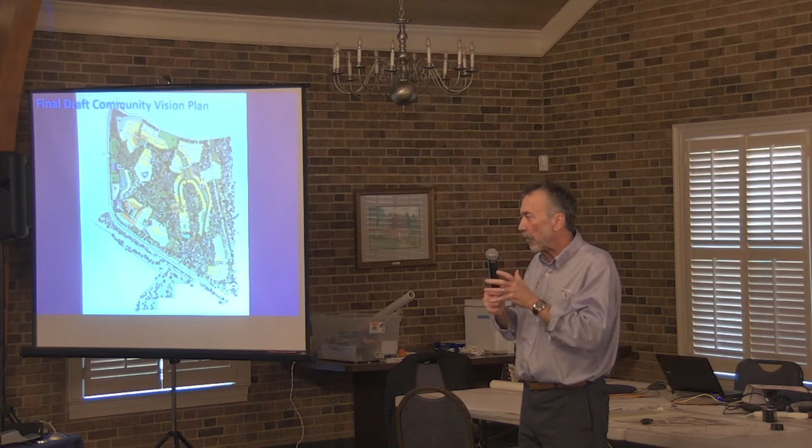So it doesn't have to be a zero-sum game. Somebody doesn't have to lose in order for somebody else to win. We can all win, but the first step is working together to understand how to make this a positive outcome for everybody. So, to get back to your question about D.R. Horton, I don't have personal experience working with them, but we did look at some of the house types they were building, and I do know that in markets where this type of community is the preferred format from a consumer point of view, they are developing new house types specifically for this. So part of it is making your preferences known in a productive, informed, concise and clear way, and we're hopeful this will help facilitate that conversation.

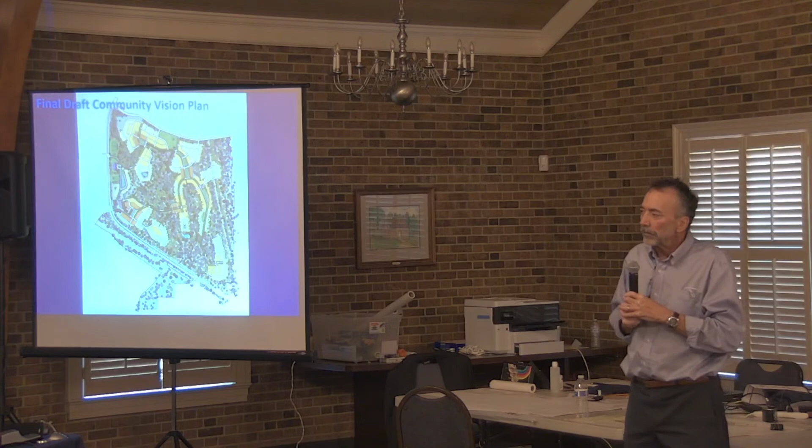Yes ma'am, what two districts were we talking about the first time? The only one I remember is the TND, traditional neighborhood.

If you've got it, is it still on the laptop, the first night's presentation? Yes, it's under all presentations. Hey, you have the same bookkeeping strategy. I can't explain it to you, but I'd be happy to show it to you.

The question was, what were the two districts? They weren't really districts, we called them community formats, community development formats. And we picked two very specific ones. I mean, you could say generic suburbia, you've got plenty of it around here, obviously, to pick from.

But the one we specifically picked as the alternative was one in which the house types and price points were typically clustered together in a single residential pod, often with a single entrance, and then the roads that service those pods had no houses that fronted on them directly. They were just a way to get access to the pods, and the pods were all distinct in terms of lifestyle, cost, et cetera.

And the other one was this, which was really based on a pre-war model of walkable neighborhoods, neighborhood-based, not pod-based, where the neighborhoods were built on timeless principles: connectivity, mix of housing types and prices, access to local parks and schools, et cetera. So those were the two alternatives we put out there. Now there's a whole gradient between those two alternatives. We only had four days, so we wanted to cut to the chase a little bit, or at least narrow it down, and that gave us the ability to say we could end up somewhere in between through this process.

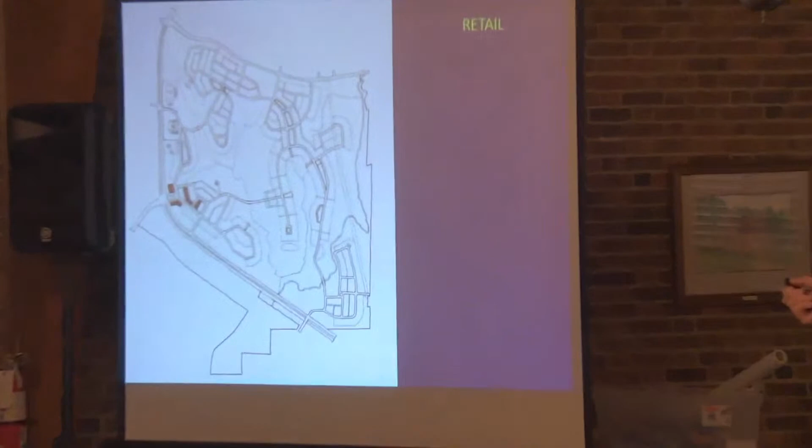And I had intended to have more renderings, but this was, you know, when we start these things—there will be more, by the way, by the time we're finished, because the intention was to render each one of those conditions based on this plan, and we just ran out of time. We were focusing on the... I'd like to really get that circle off there, but I guess we'll have to live with it.

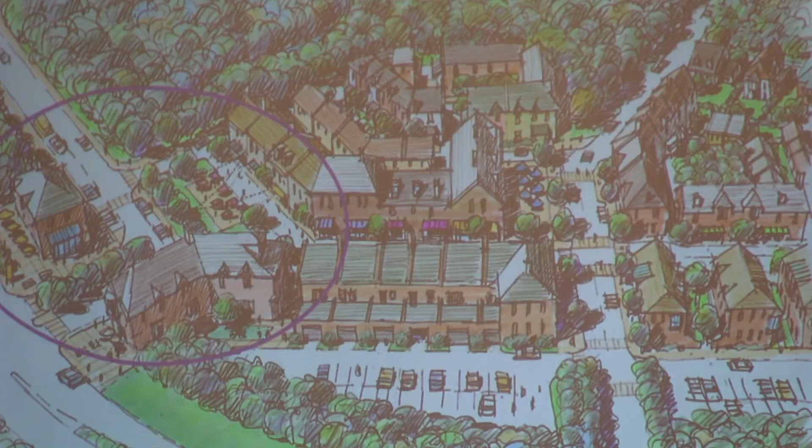So this was the village center, identifying the focused retail area, and that's the scale that it can be, if that's what the community would like to see. And then we had this one, which was exiting one of the neighborhood edge conditions. Let me show you my sketch again, so you guys get a little sense of it.

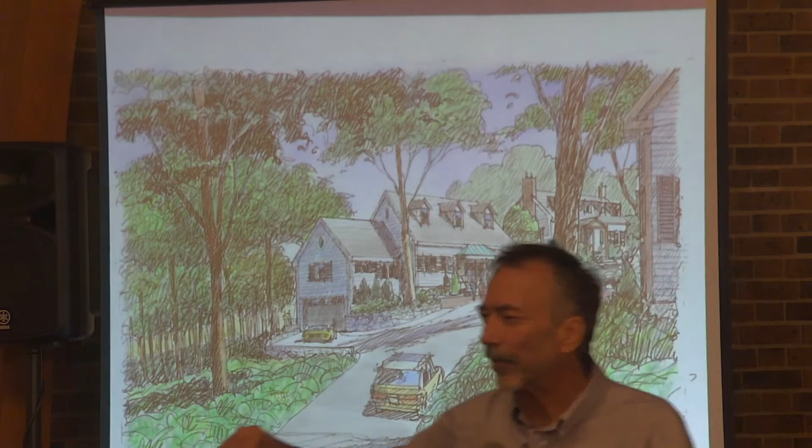Are you planning for the streets to be that narrow? I drew that literally in about 15 minutes. So this was my sketch. It's pretty impressive for 15 minutes. Yeah, so that was my rough.

I shot that with my phone this morning, sent it to Peter Roper in Montreal, and that's what I got back this afternoon—about 2 hours ago. That's what I got back about 2 minutes before the meeting started. And you might recognize it because it's about 2 blocks over here, and we loved it.

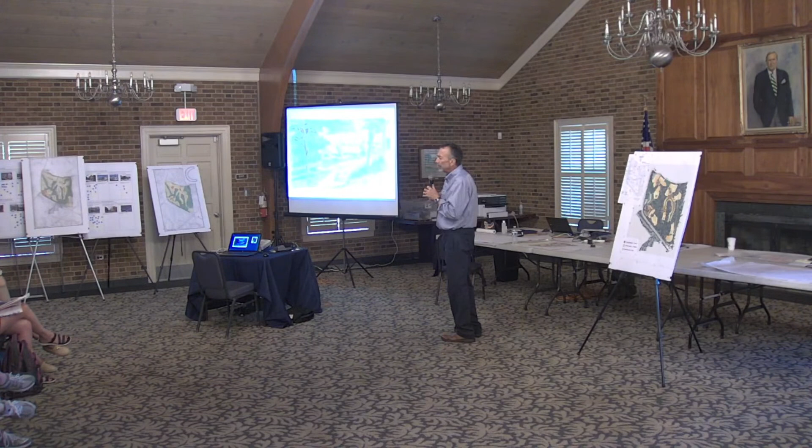I mean, it's gorgeous. But the idea is this approach gives you so many options and so much flexibility. And you know the old saying, there's no such thing as a free lunch. Well, to preserve almost 70% of a site's open space, you have to figure out a way to justify that or pay for that.

And not everybody wants to live... I know a lot of people who are moving from houses like this into townhomes or condos because they don't want to mow the lawn anymore, don't want to deal with all that. So the idea isn't to say it's all this or nothing. The idea is to say it can be both and—it can be this and that.

I think the last time around, it was very much about price point. It was very much about each, you know, serving houses that were $250,000 or less. And so everything was very much the same.

Well, there's a lot of things that drive... there's a lot of very central focus, right? Well, the thing is, it's kind of ironic. We put up some pictures in the opening night presentation of both West Haven and Crothers. The houses are virtually identical in terms of exterior appearance, and probably in terms of construction costs.

When we're talking about the different factors that influence market pricing at Crothers Farms and West Haven, there's a number of variables that contribute, but probably the single biggest factor is the school districts. I suspect that now that Crothers Farms exists, their school district is going to start getting a lot better very quickly. That's one of the reasons it's important to talk about all of this at this level of detail, because it all matters ultimately.

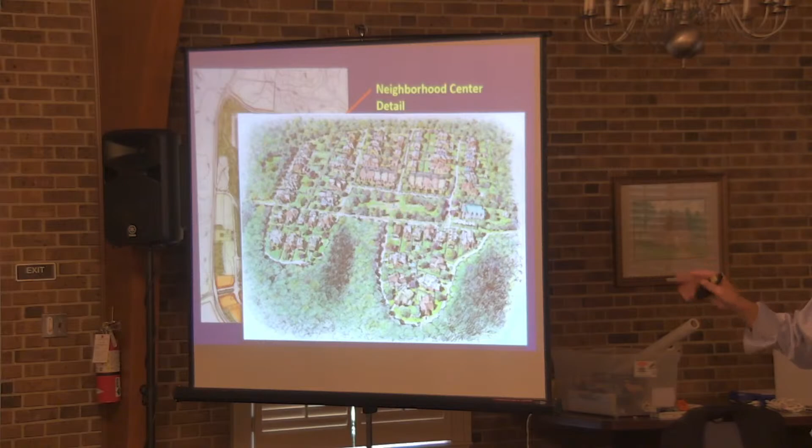My question is, when you're building these houses, do you plan on leaving any existing trees? Again, if you walk out the door, two minutes down the street, you'll see that picture, and that's exactly how they were built. So you are going to leave some existing trees? We will leave trees where it's practical to do so, but the thing that allows us to do that is some of those house types - people don't want to have trees on their lot because they don't want to deal with them falling on their houses or picking up the leaves.

The charm of this area, I don't know if people realize it, but like Guilford College, a lot of people walk down Guilford College and see dogs and kids and bikes. The reason, which a lot of people don't understand, is that whole area is just big, huge shaded trees. I'm pretty sure everybody in this room understands what you're talking about. That's what would draw people to buy houses like this, because of that same feel that Jamestown has, carrying over into a project.

I think we couldn't agree more, but thank you for your comment. I think we've covered most of it, unless there's any other topic-specific conversation related to the presentation today.